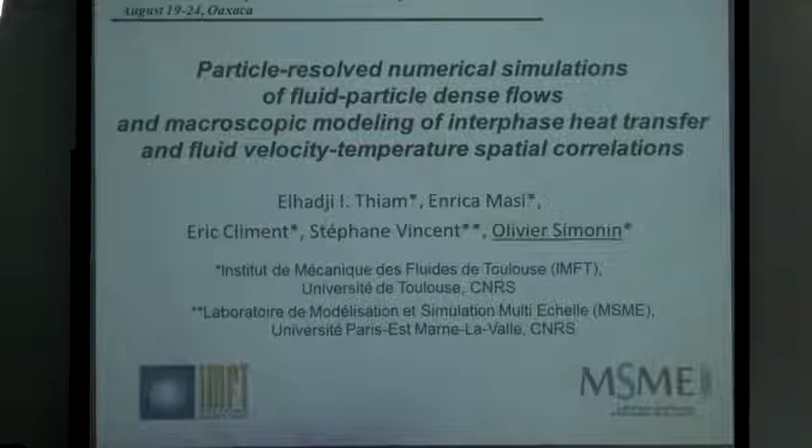So just first as an introduction, I told you that I'm doing simulation for 30 years, and this is the list of applications I have performed during this. It's not an extensive list, but it's incredible the number of particle fluid flows which can be encountered in industrial applications. Okay, and this is the ones I have to simulate, and some of them are missing.

But you have the problem of solid rocket boosters, for example, or the problem of coal-fired furnaces, or uranium oxide fluorination, which is a dusty problem. But if you are just doing the simulation, it's okay.

And also, as we have seen before, there is a nice new problem like chemical looping process or concentrating solar power. I have also made a very nice experience, which is to apply the modeling approach directly to the problem of volcanic dome collapse and pyroclastic flows, because in fact the models we used are probably more advanced than the ones used by people in this field.

Or the flow is really a multi-phase reactive flow with a lot of heat transfer, but with some scales which are a bit different. You know, you have some particles of 1 meter in size and so on.

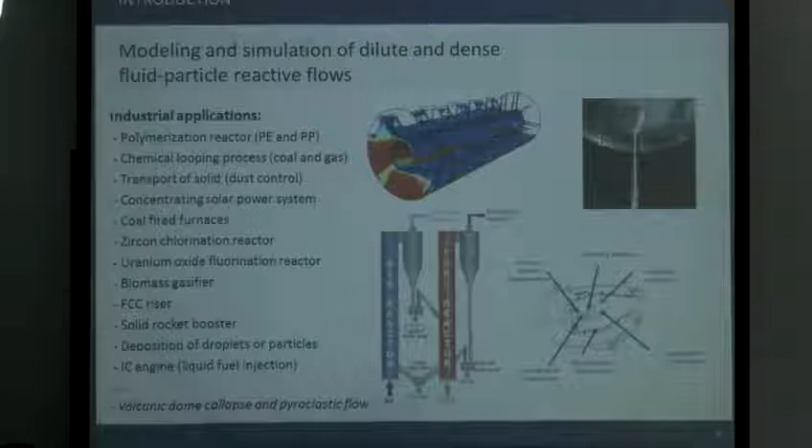Okay, so I have some kind of list of problems, but I think everybody here knows about the physical mechanisms and what can be the modeling challenges, which are a lot. Okay, as we say with Hans, the more we open doors, the more we find new questions. So it's a problem.

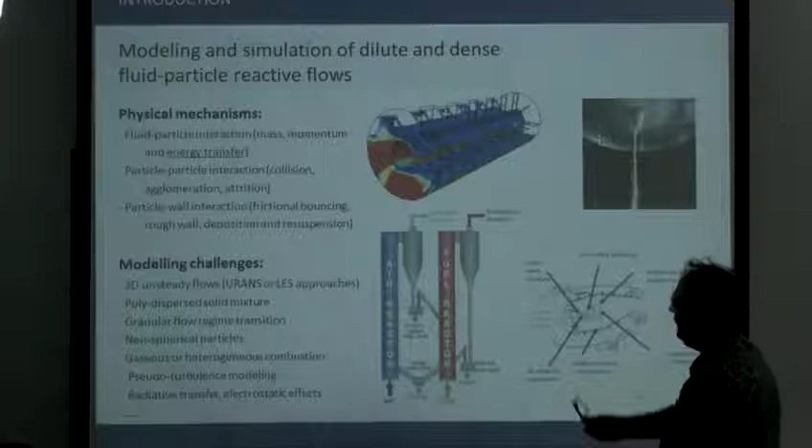I don't know how you will manage in the future, but I think we probably also need to simplify and try to extract from all the simulations some simplified approach, because I'm always very impressed by DNS, but every time new phenomena appear, and we don't know how we can account for them. So in my presentation, we just focus on the question of energy transfer, which seems to be obvious, but in fact we don't have so much information about that.

So the methodology we are using is very classical now, and we have some very nice examples here. And we have roughly 3 different scales of simulation: one is a microscopic scale, the particle-resolved simulation.

The mesoscopic scale, where you can track 10 million particles, and you can capture collective behavior. And finally, we want to go to the macroscopic scale. And we are running effectively, as I showed you before, really a lot of applications. And the scales, we can say about 1 millimeter, 10 centimeters, 10 meters to 10 kilometers.

If you are simulating the volcano, then you need to have a large domain of simulation. Okay, so I think that at this kind of scale, normally the discrete particle simulation becomes unfeasible, but the complementarity of the approaches is really very important.

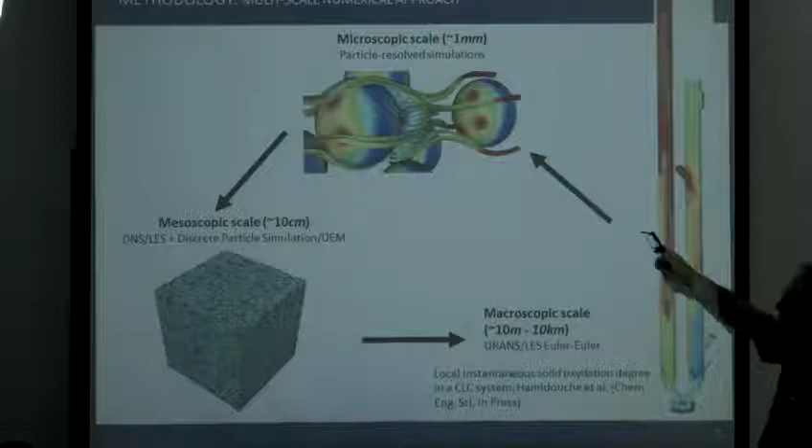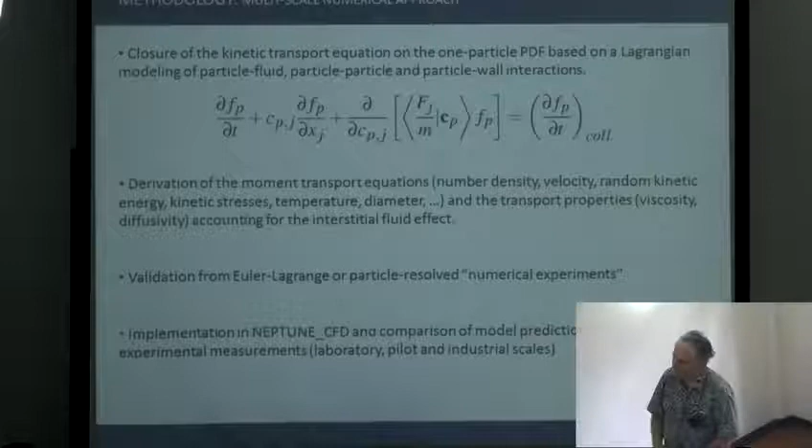So in fact, in my talk, I will skip directly from this one to this one, and I will not pass by the intermediate approach. So this is just the explanation of how we can pass from one level to another. And for me, the kinetic equation is important, because it's a tool which allows me to make this change of scale, okay, to pass from the microscopic to the mesoscopic and finally to the macroscopic scale.

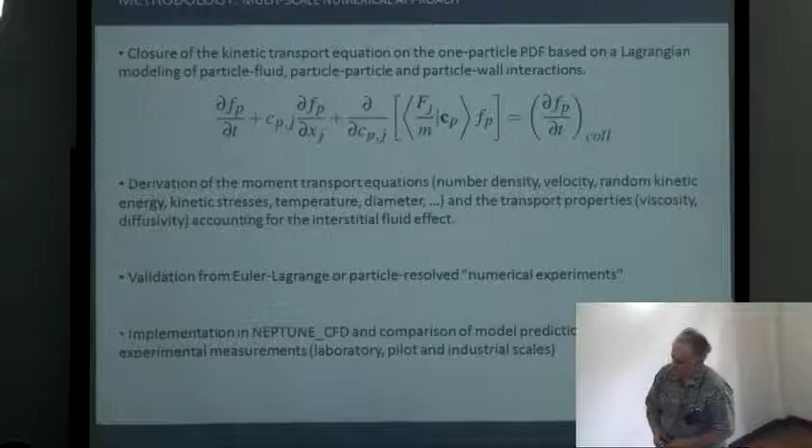And finally, we implement our model in Neptune CFD, which is a code developed for nuclear applications, but we have extended it to gas-particle flows or fluid-particle flows. And then we can really apply it to a real process.

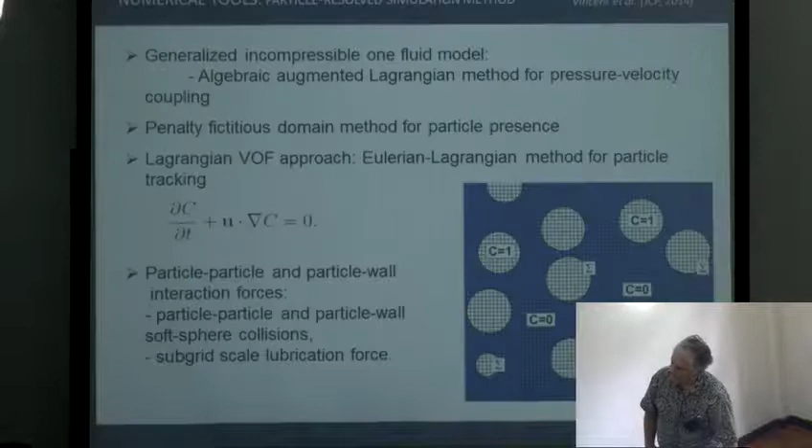So for the tools, I will give very few details, and if you are interested, there are a lot of details in the paper of Stéphane Vincent in the JCP. But roughly, the specificity is that it's really dedicated to particulate flows.

So we can treat the interface equation in a Lagrangian manner because we really know the shape will not be deformed. So it's interesting because it helps us - we have no diffusion problems and so on. And also, we need to treat the collision, the interaction between the particles.

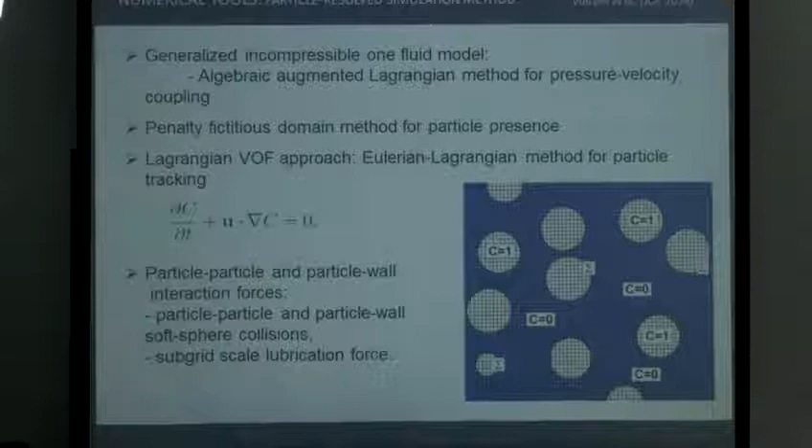So we need to have this Lagrangian treatment of the particles, so we can include the particle-particle and particle-wall interaction force, and we account for soft-sphere collision, and we also have a subgrid lubrication force effect. So the equation set we solve is the one written above.

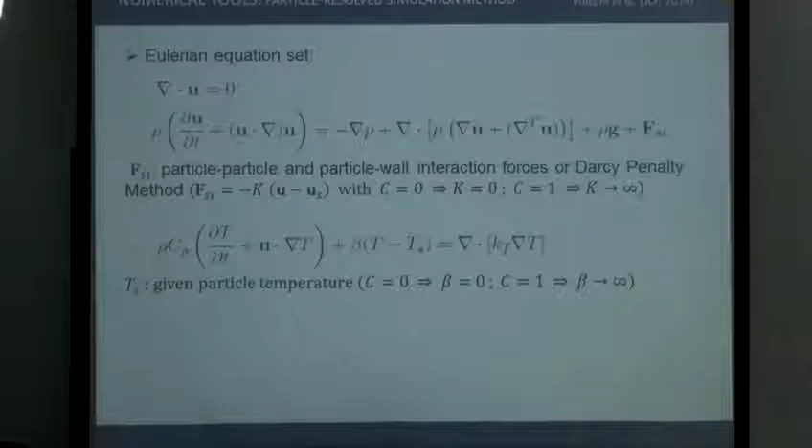Then you have a viscosity which depends on conditions - if you look roughly, it's more sophisticated than that, but roughly we can say the viscosity is infinite in the solid and is the true fluid viscosity in the fluid, but the viscosity is not the same according to the shear, and there is some sophisticated implementation.

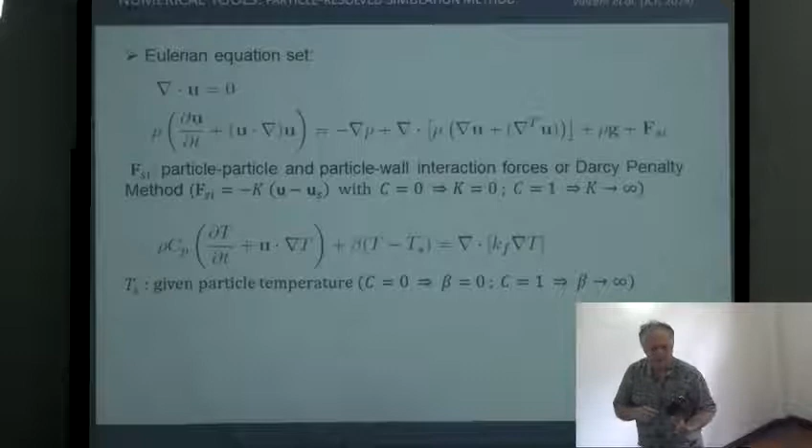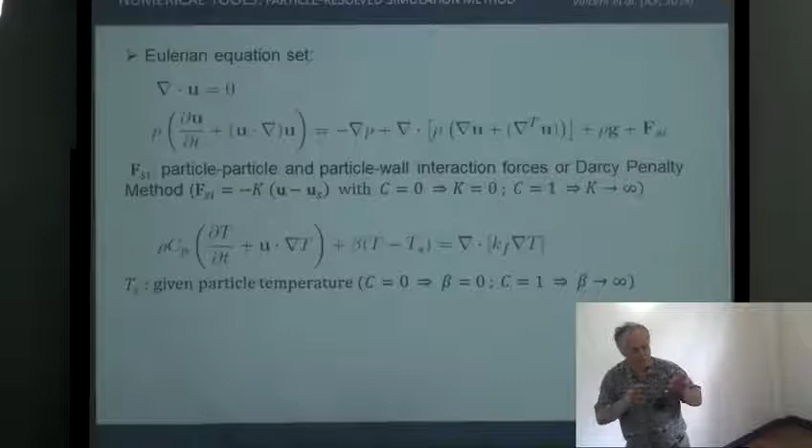And you have an additional force term, which accounts for the particle-particle and particle-wall effect, or you can also use it, if you know the particle velocity, to force the velocity by a penalty method. So this means we can use this approach both for unsteady particles which are moving, or particles which are fixed by this penalty method.

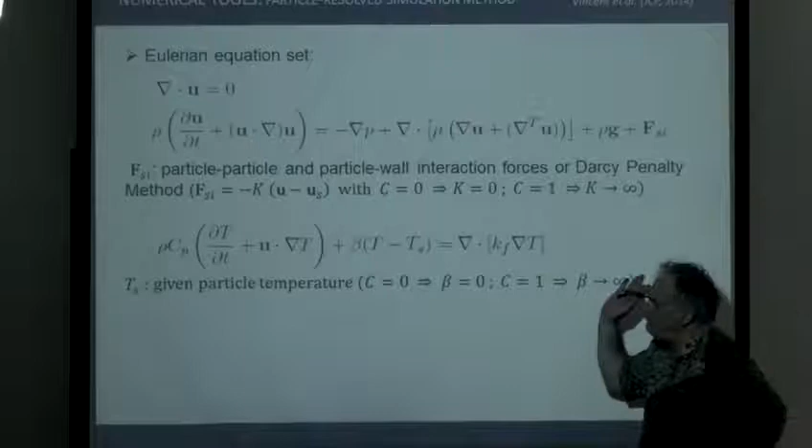And then we have also a transport equation for the temperature. In the approach I will show you, we just use a penalty method, and we will force the temperature of the particle. So it's a simple case. We have used this code in several applications, and I will just show you very briefly some latest results - I'll be brief because it's a simple flow.

It's just a Couette flow. In this Couette flow you have two moving walls, and we are trying to analyze the dynamic behavior of the Couette flow. So you can compute the mean velocity, you can compute the particle kinetic agitation. In this case it's mostly uncorrelated kinetic energy.

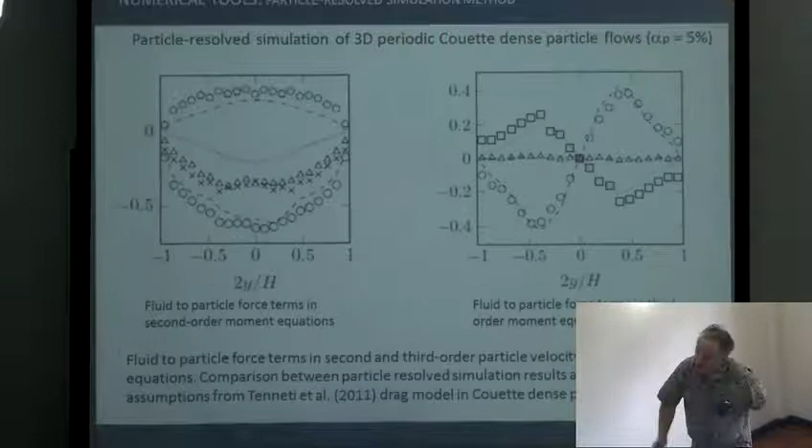And more interesting, you can also compute the drag correlation terms which appear in the Eulerian equation. This is really interesting, and you can compare these drag correlation terms with the ones you can derive from existing model assumptions. For example, it's very impressive, I think, because you have no adjustment of anything.

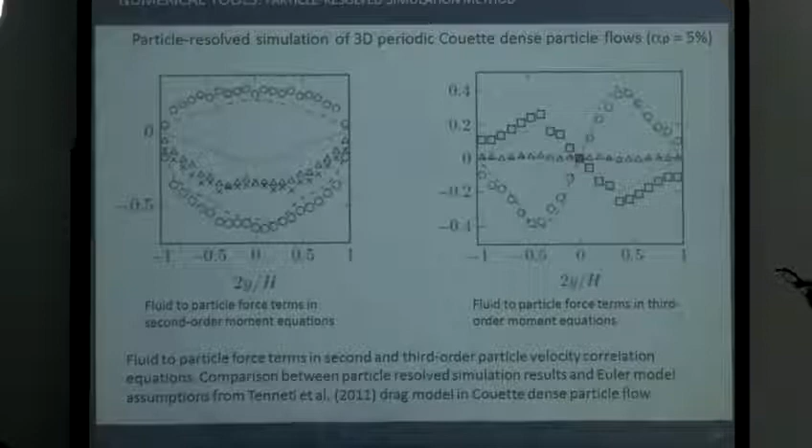Just by applying the Tenneti et al. correlation, you can see that the second order drag term and the third order drag terms are quite well captured by the model. And it's much better than if I use the classical Wen and Yu closure.

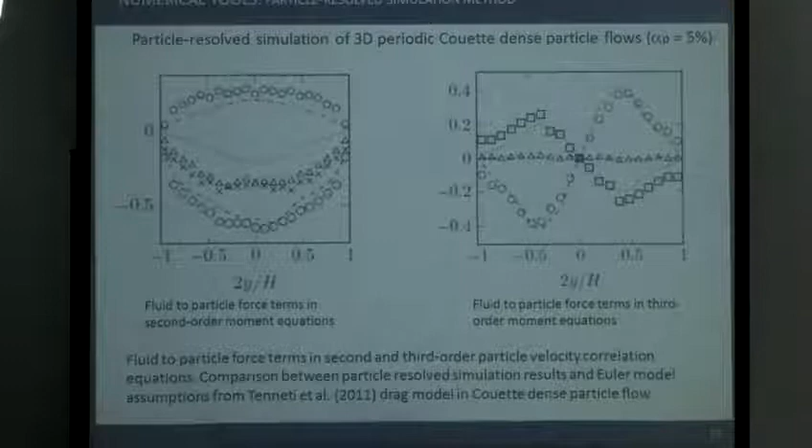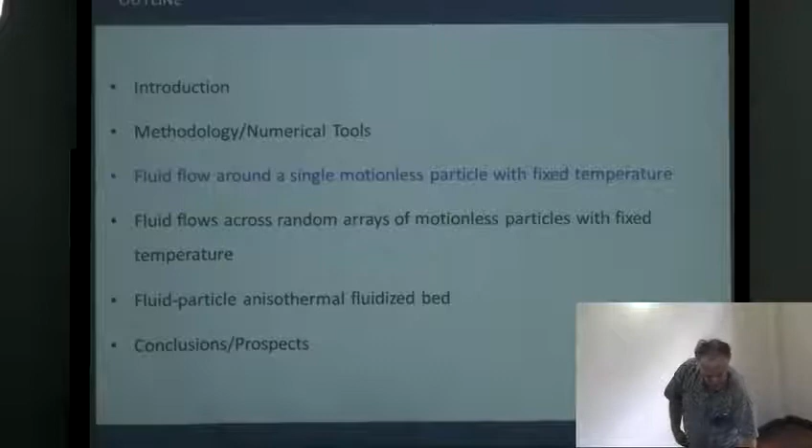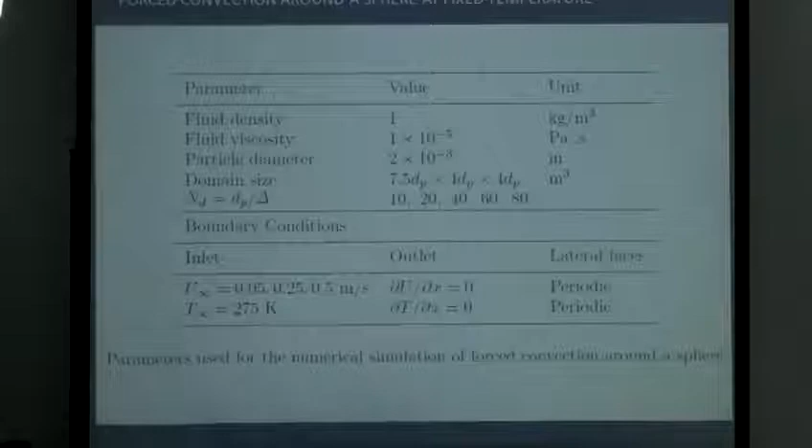Then we move to the topic which is more about temperature. I will go very quickly on this part, just to show you that we have tried to perform some validation of the heat transfer also in the case of a single particle. And we have tested the sensitivity to the number of cells in the particle diameter to see how the prediction converges. We have done that in both unsteady and steady conditions.

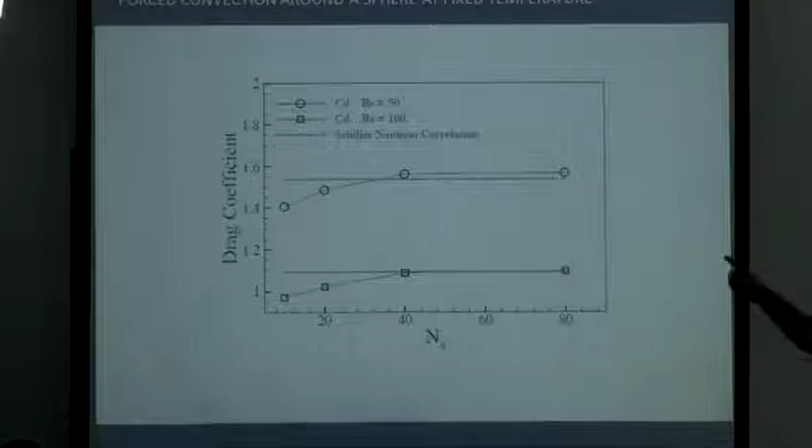So these are some typical results, for example for the drag coefficient with respect to the number of cells in the particle diameter, showing how it's converging. And the same for the Nusselt number.

In fact, we have two values because we compute the Nusselt number in two different ways: one from the particle heat transfer and one from the heat balance on the fluid. So normally we should get the same result - it's also a check on the accuracy.

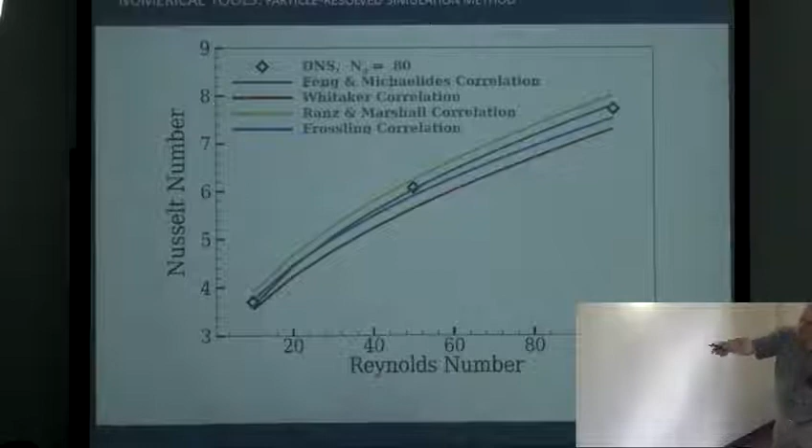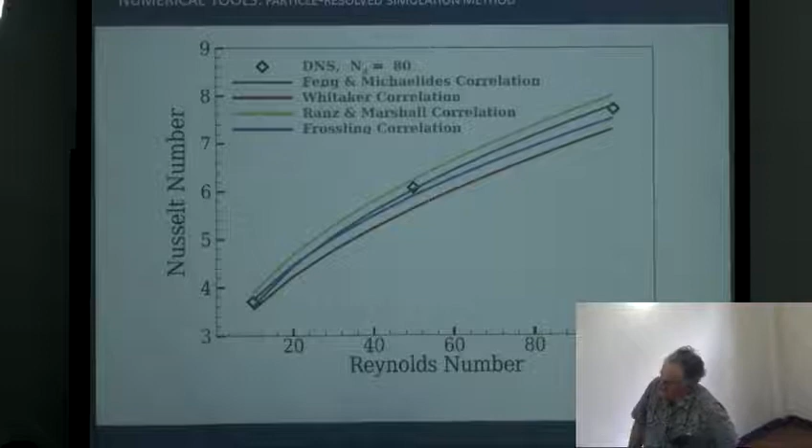So finally, if you compare the Nusselt prediction with respect to available correlations, we can see that we have a good agreement. But the number of cells in the particle is quite large, 80, and we will not use 80 cells in the next simulation. The best agreement is obtained for the Feng and Michaelides correlation, but that is also derived from numerical simulation. So sometimes...

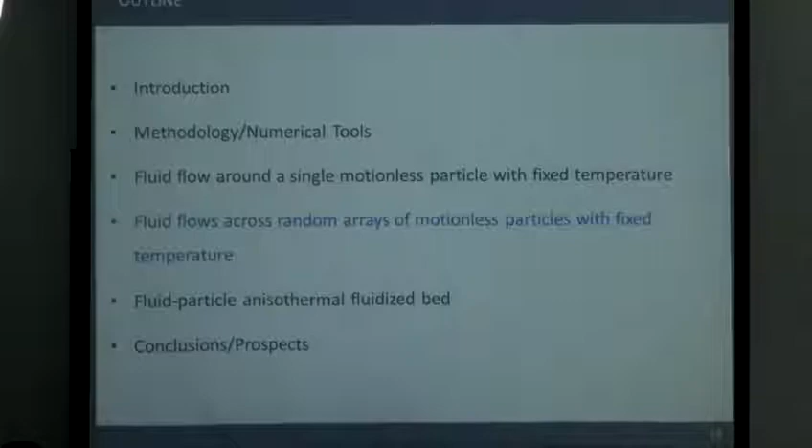Okay, so most interesting is the fluid flow across a random array of motionless particles with fixed temperature. It's a classical case now - this has been done before, but we will also be doing it again. And this is the description of the case.

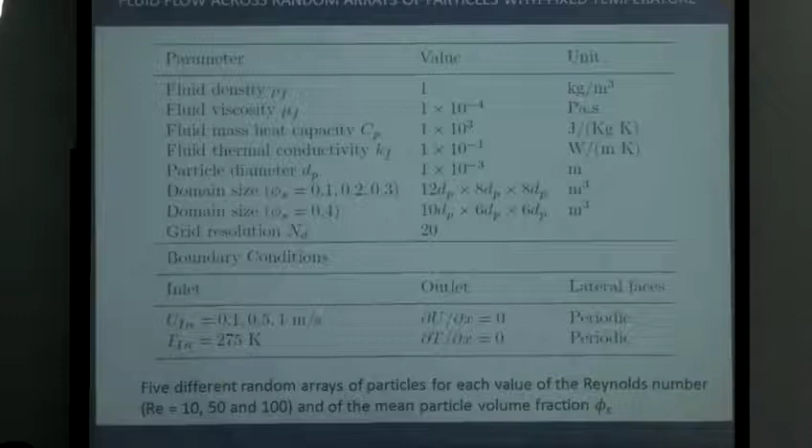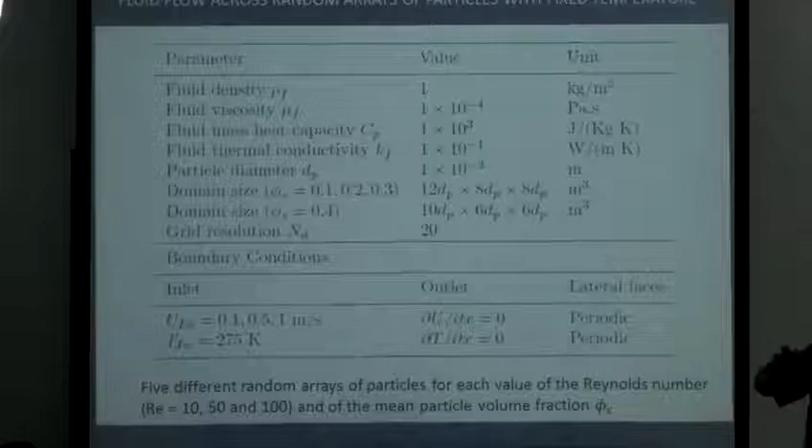I think this part isn't very interesting by itself. The only interesting thing is that we play with the mean solid volume fraction, from 10% to 40%. You see that the grid resolution is quite coarse, 20 - not so much. And in fact, we have generated random arrays, with 5 different random arrays for each case, so we can make an averaging over the random arrays, okay?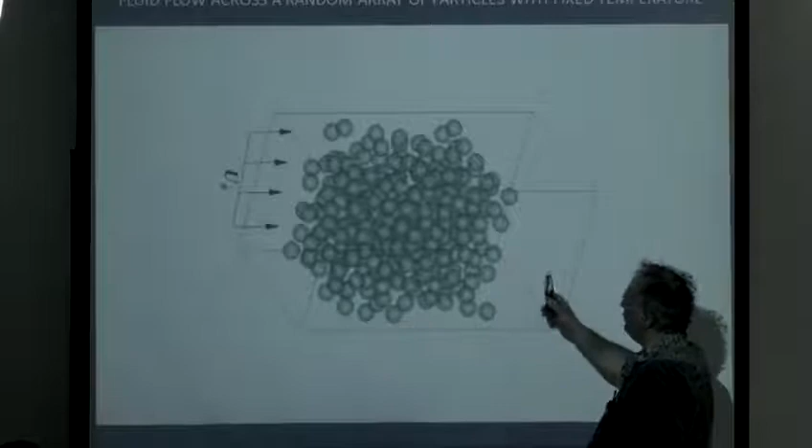Okay, so you see that we also vary the Reynolds number. This is the sketch of the flow - you have the entrance and the outlet, and we want to extract the Nusselt number in a steady state region. So we will measure it in this region.

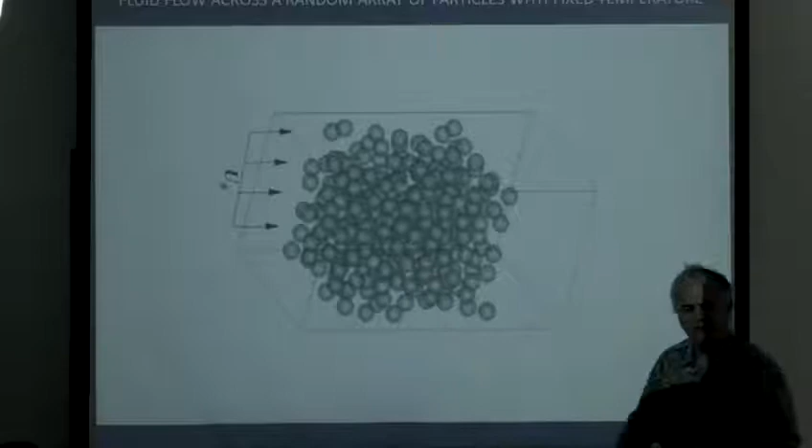So typically, this is the volume fraction that we obtain if we make an average on the transverse direction of the flow. You can see that this is the entrance, then it's quite a steady situation, and then it's the outlet. So when we try to extract the Nusselt number, we will compute between these two planes.

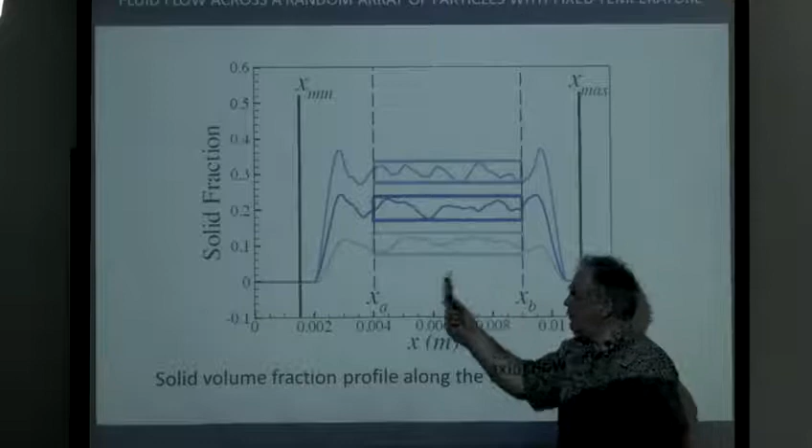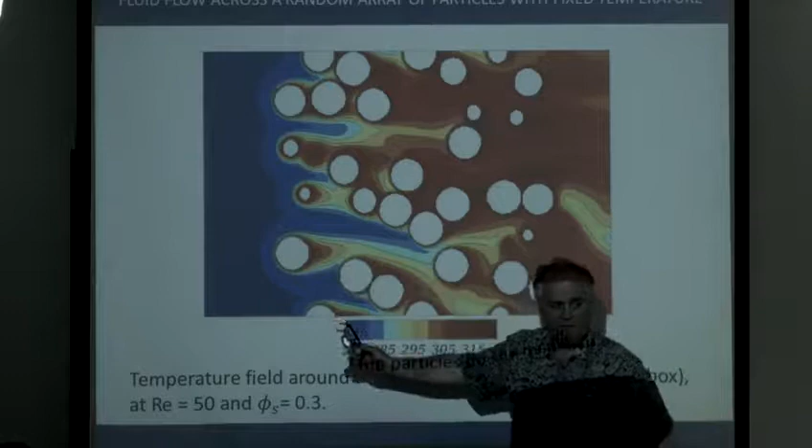Okay, so this is a picture of the temperature field around the particle, taken in the middle of the box, for a given Reynolds number. It's clear that you have a very strong effect at the entrance, but also some very strong effect due to the respective position of the particle, which is a very big problem, I think, for the modeling.

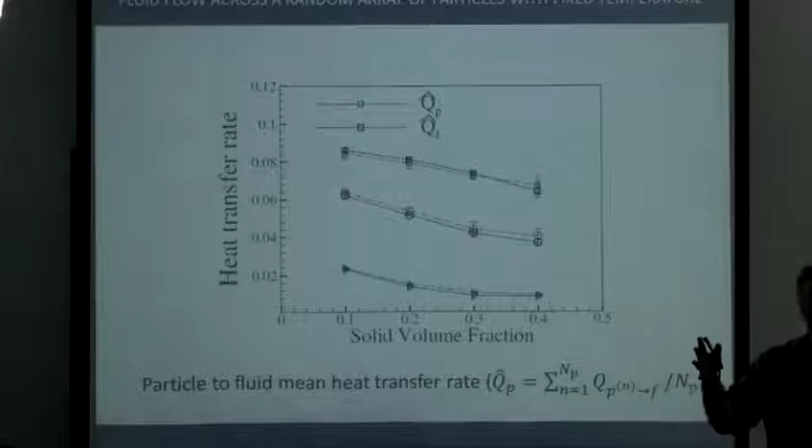It's a total heat transfer rate across the array for the different cases and for different Reynolds numbers. What we compare is the sum of the flux computed for each particle with the balance on the fluid flow. So normally the results should be identical. We are not too far from identical, okay.

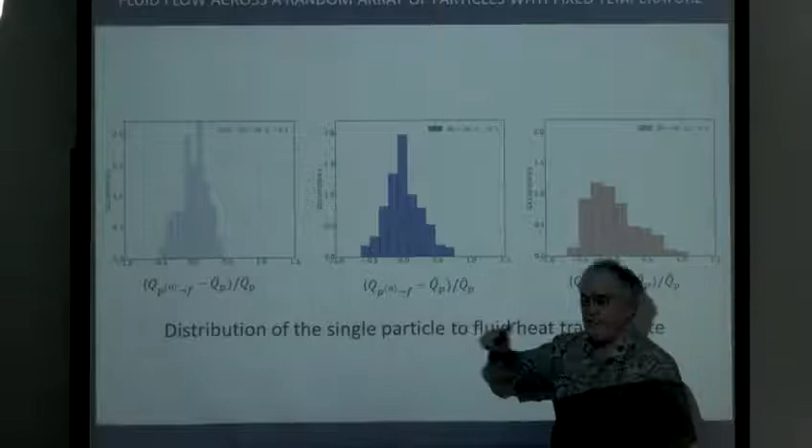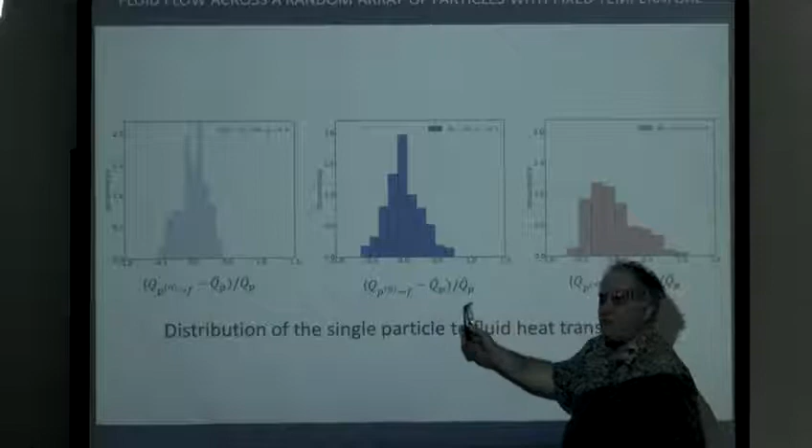Very interesting, I think, is the dispersion of the heat flux. This is the distribution we found in all our simulations, from the heat transfer from a given particle to the fluid, normalized by the mean heat transfer. And you see that the dispersion is huge.

So it means that if you want to do a Lagrangian simulation, it's a big problem, because normally all the particles have the same temperature, and you have more or less roughly the same fluid temperature viewed by the particle. We have tried to extract a more representative fluid temperature by playing with the mesh averaging around the particle, and in fact it is not correlated. The information is not enough.

It's clearly probably mostly due to the position of the neighboring particle. So it's really a question of the arrangement of the particles more than a question of the fluid temperature viewed by the particle. So it's really a big problem. Hopefully, in the Eulerian approach, everything is filtered. I don't care - this is a problem somewhere, but I don't care.

You have the transfer from particle to fluid, and you have a correlation which is not a turbulent correlation because the flow is steady - it's a space correlation. It's because you have a heterogeneous distribution of velocity and temperature. In the literature, you have two models which are generally available.

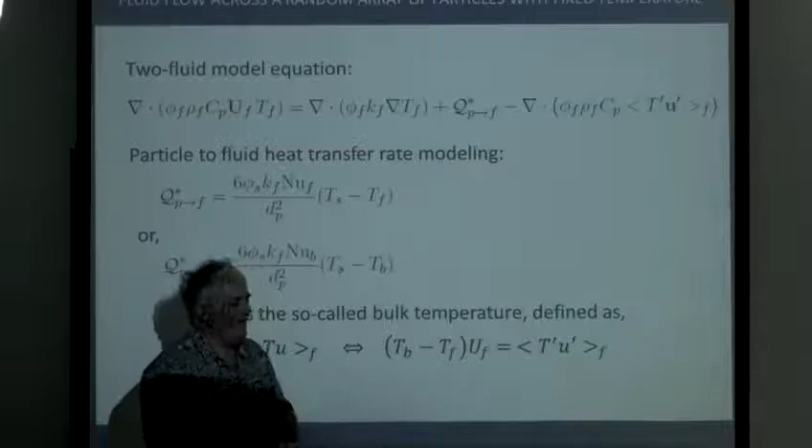One is in terms of the mean fluid velocity - this is the most practical from the modeling, the simulator point of view, because this is the temperature you compute. Normally you prefer that the model is written in terms of computed variables. But this temperature, this modeling seems to be not so robust sometimes, and people sometimes prefer to write in terms of

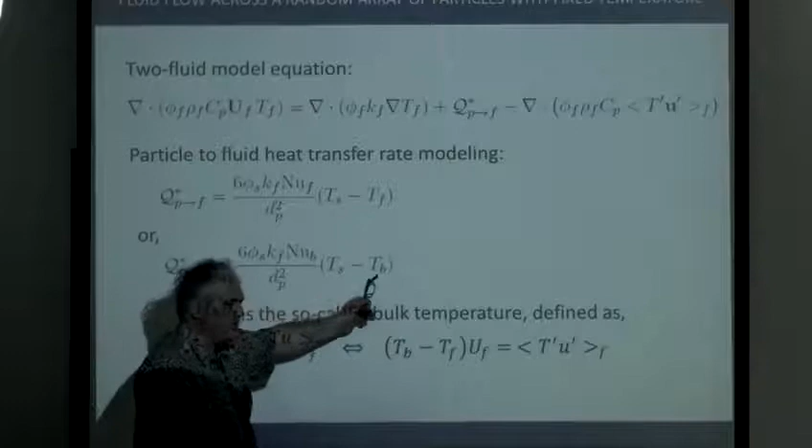the bulk temperature, which is in fact the temperature conditioned or weighted by the fluid velocity. So naturally you have two Nusselt numbers, because both correlations should give the same transfer. You have to be careful of that - you cannot use this bulk number with this temperature. It's completely wrong.

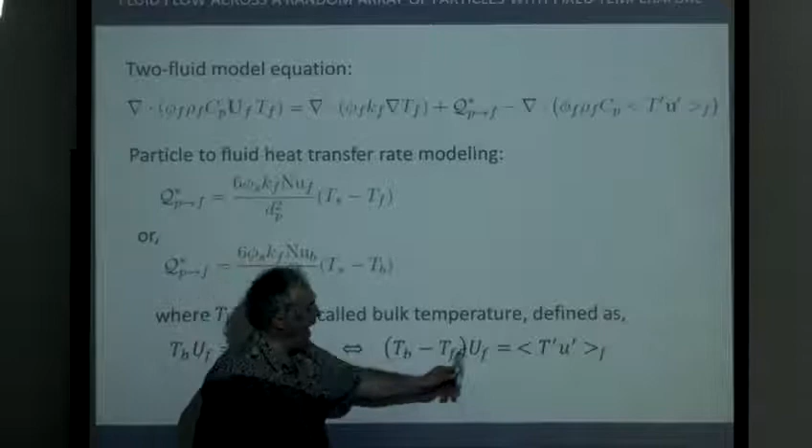And it's interesting to notice that according to this definition, there is a direct connection between the difference between the two definitions of the temperature and the temperature-fluid velocity correlation. So in fact, it's funny because it gives us information about this flux.

So we have computed this number, this bulk Nusselt number, from the simulation results, and we have compared it with some correlations from the literature, in particular with your work. It is this one, no? Sun et al.? Oh no, Dean, sorry. Okay, we can see that the agreement is good.

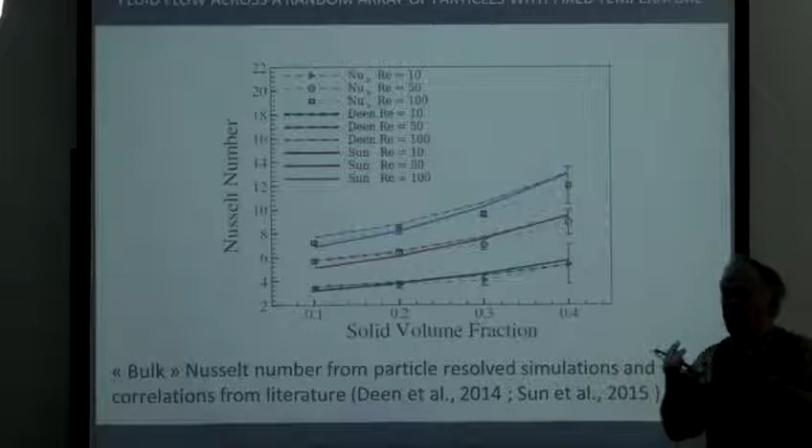In fact, this is not an error bar - it is the dispersion due to the 5 different random arrays. So this is a mean value, but we have 5 different random arrays, and maybe 5 is not enough - maybe the average is more like that. So it gives you also an error if you want, but it's a statistical error, not a numerical error.

And we have also computed the standard Nusselt number, we can say. And it's very interesting - we have no true explanation, but it compares very well with the Gunn correlation.

Surprising, yeah? But you can see that the two Nusselt numbers, because the scales are the same, this Nusselt number is much larger, larger than the previous Nusselt number.

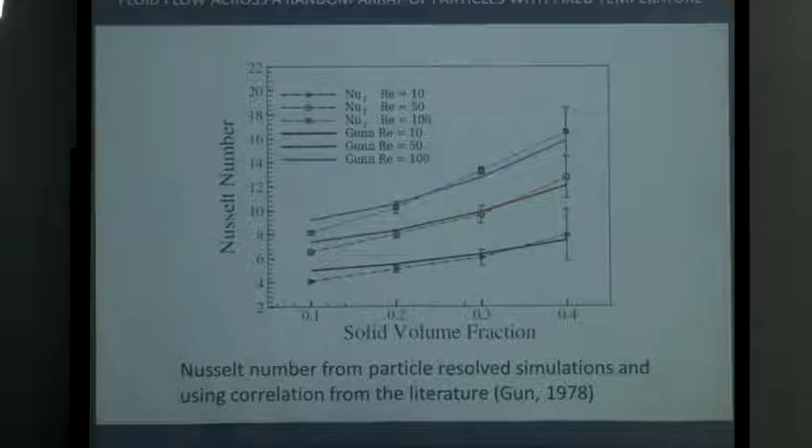So we are more or less satisfied because we obtained the same type of result, and we have also identified this question. The next step is, can we from this simulation extract some information about the velocity temperature correlation? Just by definition, according to the heat flux, the correlation is directly related to the ratio of the Nusselt number.

It is a definition result, not an assumption, okay? In our case, because it's steady and so on and so on.

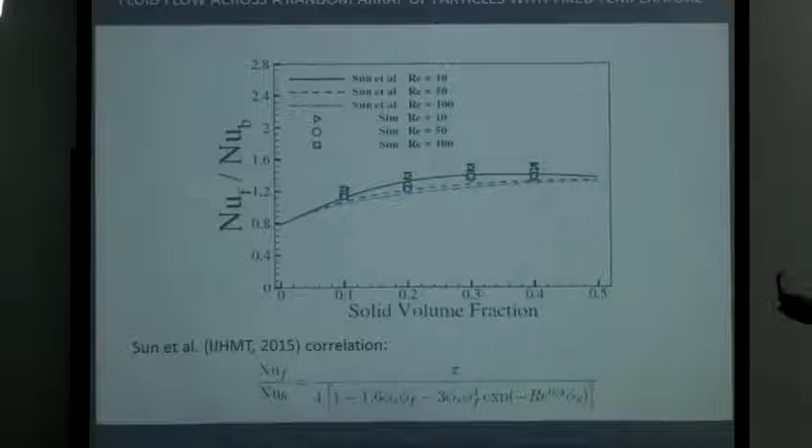And it's funny because in the Sun et al. paper, they gave a correlation of this Nusselt number ratio, which, as you can see, is always larger than 1 for our simulation case, and can be about 1.2, so 20% larger.

And this correlation worked quite well with our simulation because we didn't fit anything. It's a direct comparison.

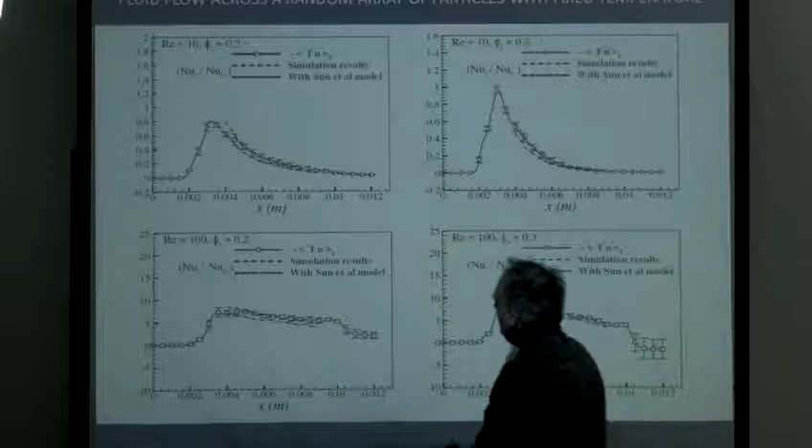So finally, what we have done, we said okay, maybe now we can compare locally, because this was an average analysis. So now we will see how this fluid velocity correlation is changing in the flow, not at the entrance. My student was too careful.

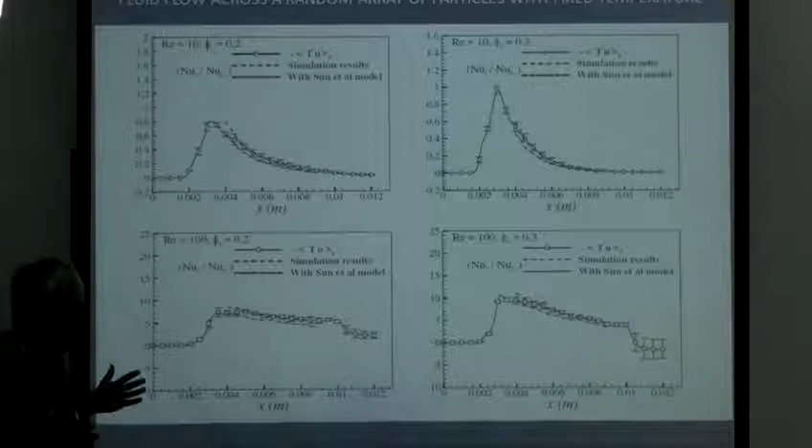So I think it's a wrong idea - you should try, you never know. Sometimes the models are working better than you expect. So he said, no, I compare only in the good region.

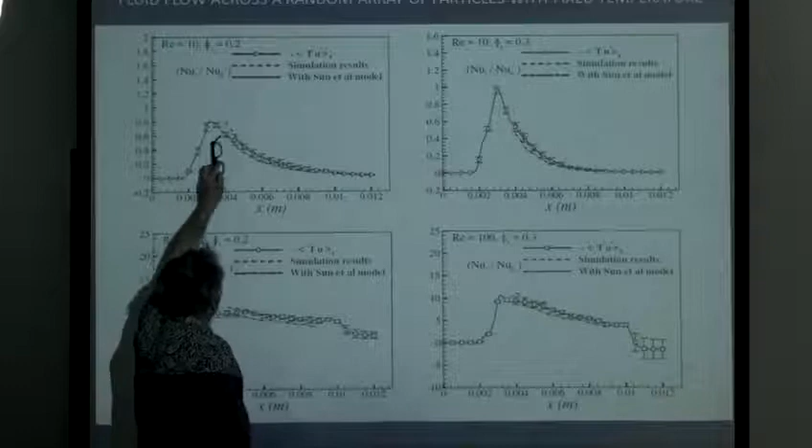But these are in fact the temperature velocity correlation measured across the flow, and we compare with the expression given in terms of the ratio of the Nusselt number. We compare with the ratio obtained from the particle resolved simulation, and it works.

And it's logical because, in fact, it's nearly steady, so it's homogeneous. The only variable which changes is the mean temperature, so it works well. And if we use the correlation, the agreement is also very good.

An interesting thing is that if you look carefully, what happened? If you look carefully at what this correlation means, in fact it changes the transport velocity, because you can add this correlation term to the mean convection.

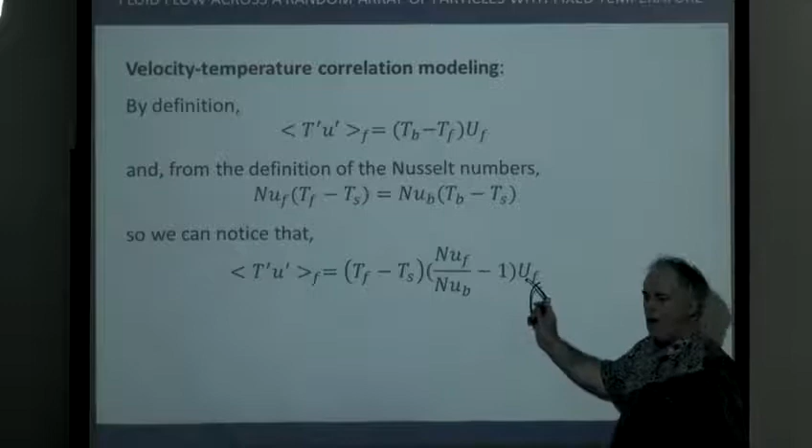This means that the true velocity is the ratio of the Nusselt multiplied by the fluid velocity. So in the two-fluid equation, I should not use UF as a convective velocity, but Nu_F divided by Nu_B times UF. So it's a 20% larger transport velocity.

Okay, so now we say, that's interesting - what happens in a fluidized bed? So when it's moving, what results may we have?

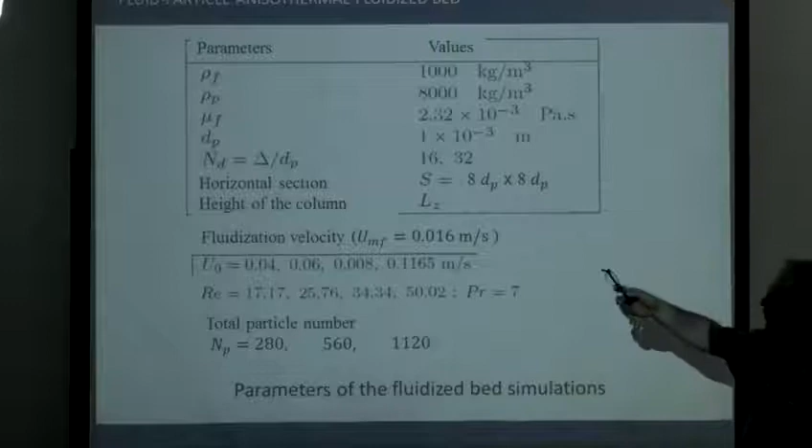So it's really a preliminary result, but we have made some simulation of a liquid-particle system. It's a fluid-particle case, a liquid-solid flow, but the ratio between the fluid and the particle density is just 8, so it's not a gas-solid flow.

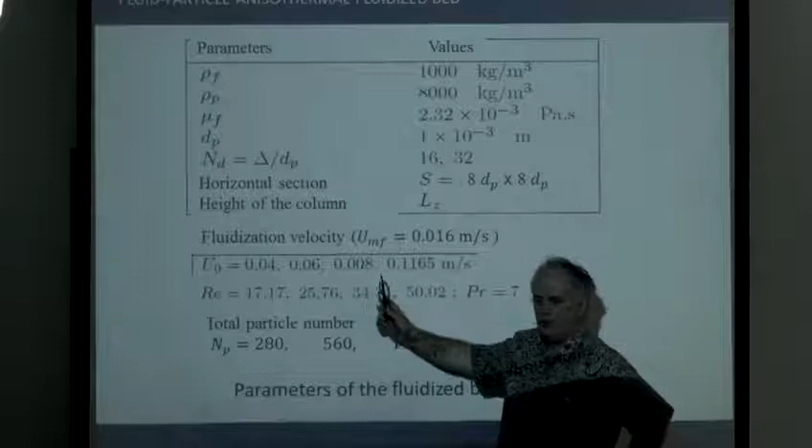And we have played with the fluidization velocity - and this is a mistake, there is a zero too many, okay - and you can compare with the minimum fluidization velocity.

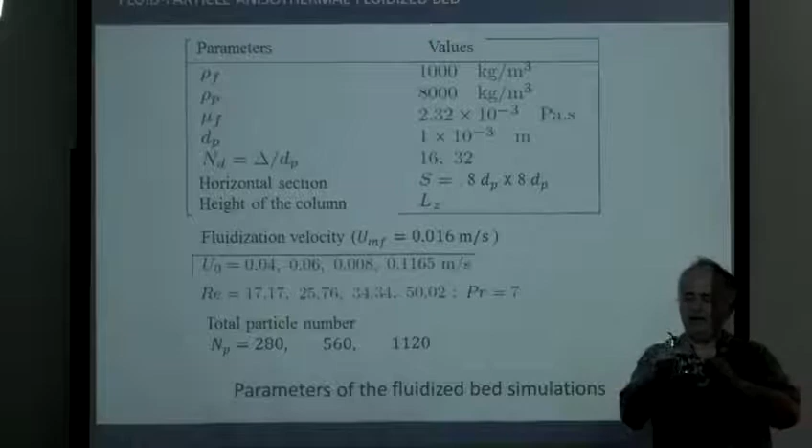And we choose the Prandtl number just because we want to have the exchange of heat across the width of the fluidized bed. Because if the exchange is too short, the fluid will be heated within just two rows of particles, so we fit the Prandtl number so that the exchange happens over the total width.

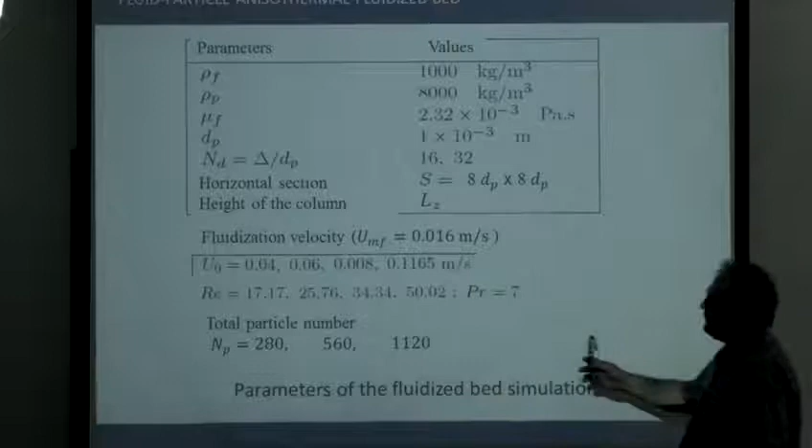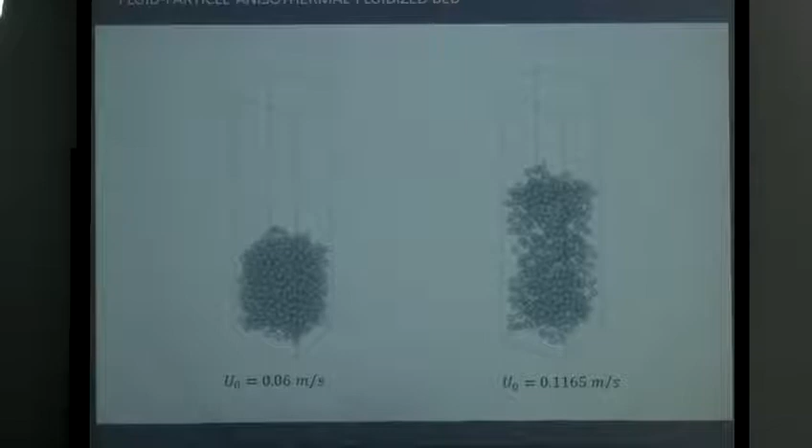And we make some simulations with different particle numbers to see if we have an effect of the height of the bed. Typically this is the result for one case, for two different fluid velocities.

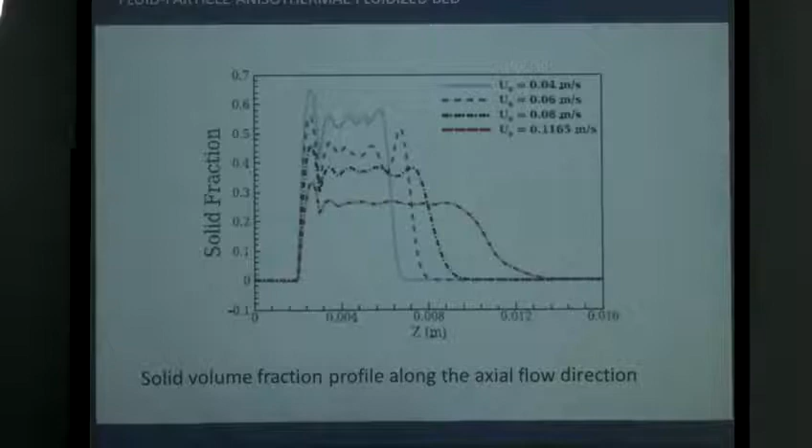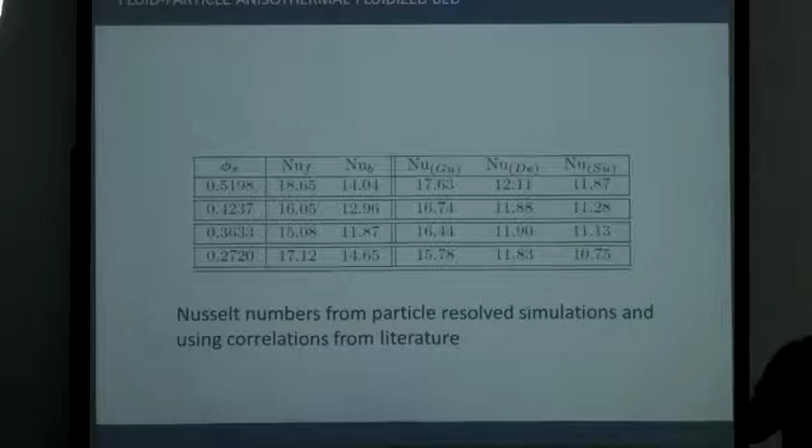And in fact, we can again compute a Nusselt number. It's important to realize that I am in the frame of the fluid phase, okay? I'm looking at the average heat transfer from the particle to the fluid. I'm not talking about the Nusselt number of a single particle, because it's completely different, as we said before, because of the arrangement and so on.

As you see, we can compute both the two Nusselt numbers, and we have this difference with a larger standard Nusselt number compared to the bulk Nusselt number. The agreement with the correlation is not so good, but it's not very far. We don't see some very strong effect due to the fluidization.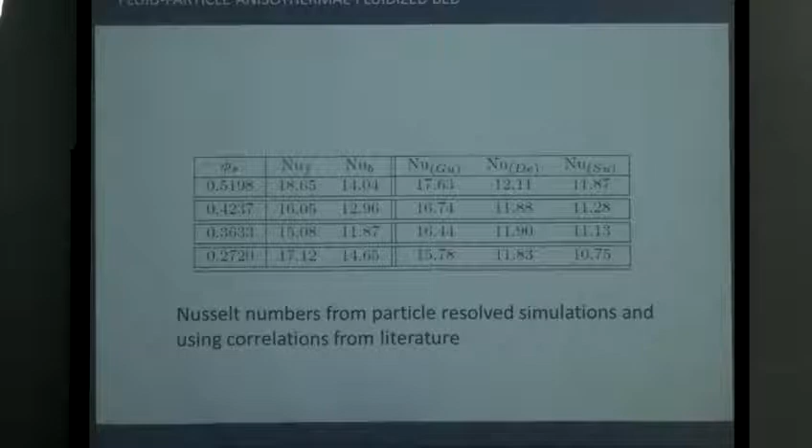There are some effects, but I'm interested in industrial prediction, so for me, 50% is identical. I understand that if you want to publish in JFM, 50% is 10 papers, but if you are interested in simulating a full industrial process, maybe it's not so important.

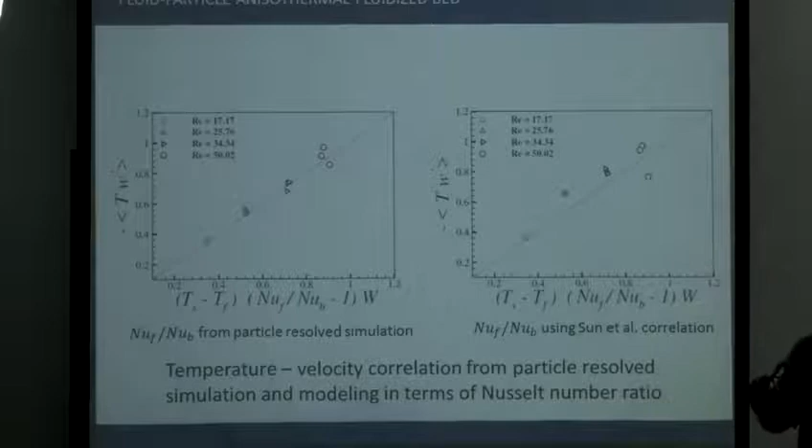It depends. Another very interesting thing is to check this model of the temperature velocity correlation. Even if we are working on some average, and now we are unsteady, so the assumptions we made before are not completely satisfactory, you can see the model is working very well. This is the comparison between the two values. If we use the correlation from Sun et al., it is not excellent, but it is not bad. We have a good estimation of what is going on.

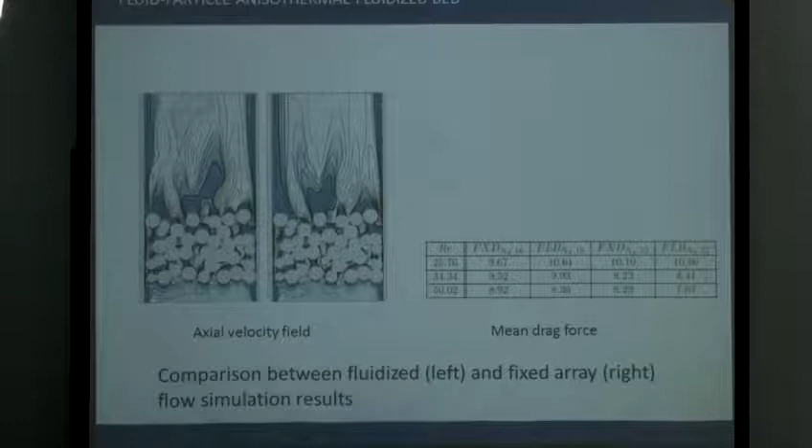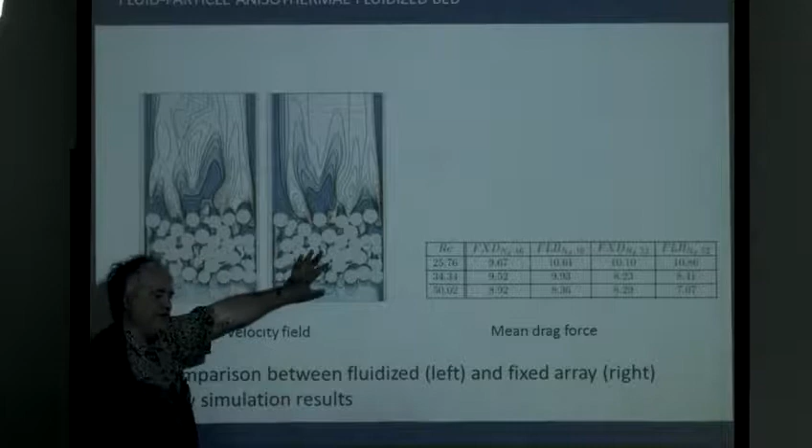Finally, to try to understand what's going on and the influence of unsteadiness, we made a simulation where we take the fluidized bed at a given time and freeze the particles. So the array is exactly the same as the one we have at a given time in the fluidized bed. You can compare the average on this random array, and we have taken several different times, with the one obtained in the unsteady case.

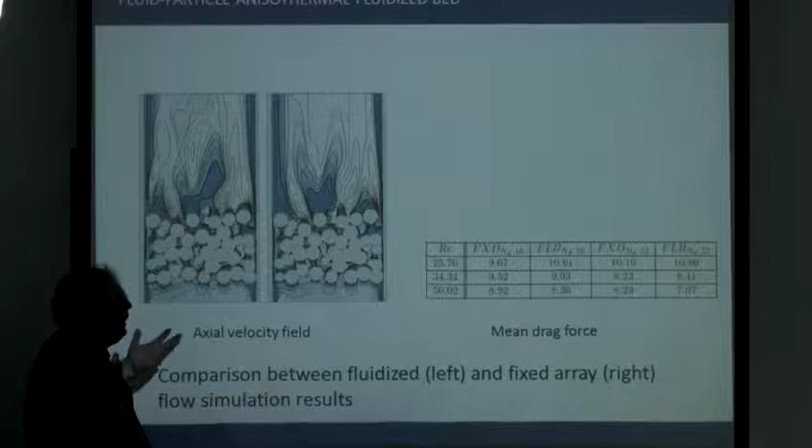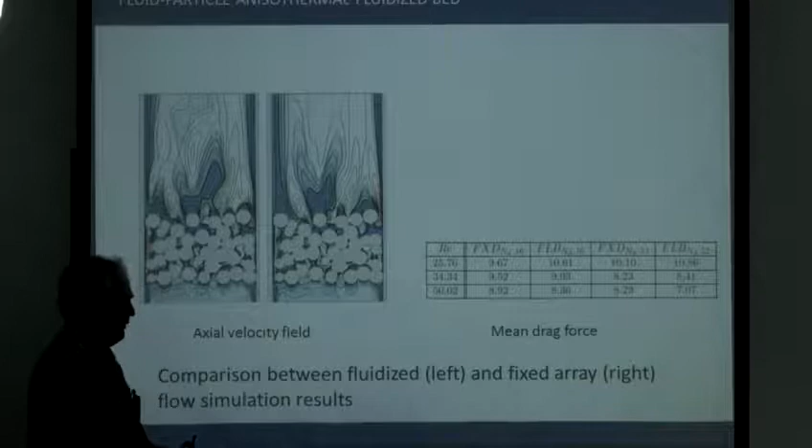In fact, what I want to see is how this inertial effect in the flow will affect the drag or the heat transfer. So it's a nice numerical experiment. We did that, for example, to analyze the modification of the drag force, and we didn't see, for this case, a strong effect.

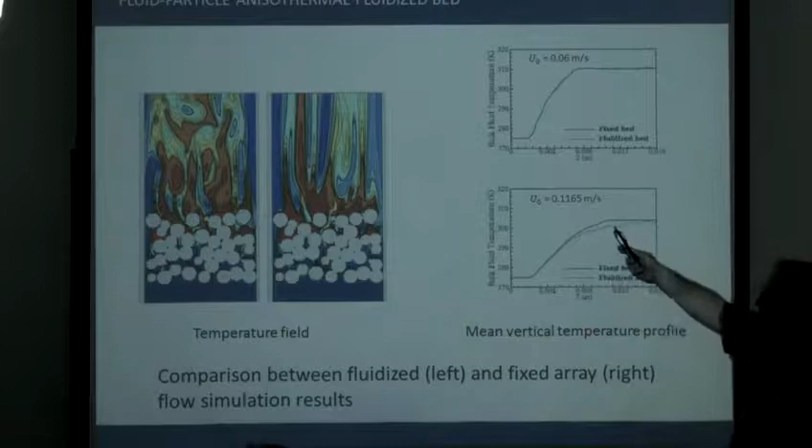We also analyzed the temperature field. An interesting thing is, even if in average it looks roughly the same—this is two different fluidization velocities, so we expect more effect when the fluidization velocity is larger, and this is the case. We have the difference between the fixed bed and the fluidized bed of the mean bulk temperature, which increases. You can see that the fixed bed has a larger exchange coefficient than the unsteady bed.

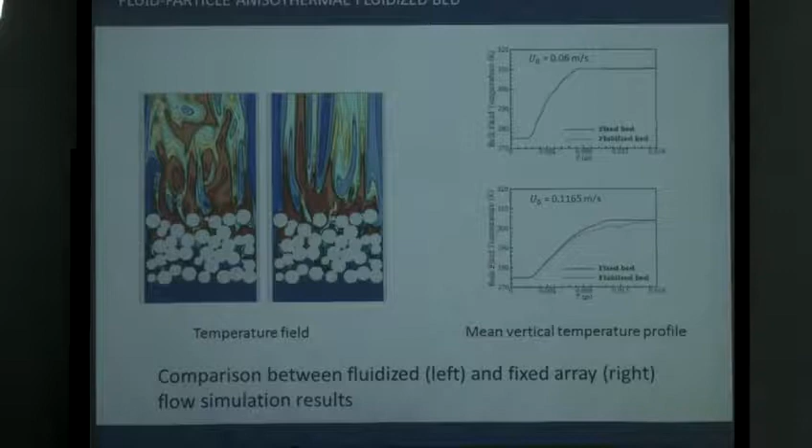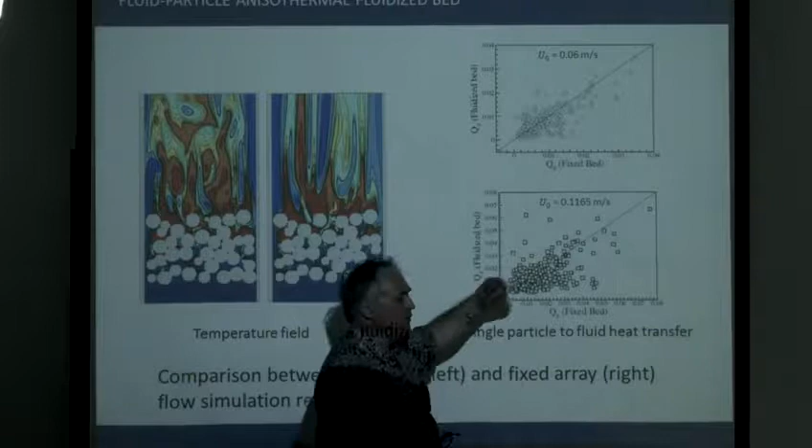But now we've made another analysis, which is more local. We are comparing the heat transfer on each particle, at the same position, but one in the fixed bed and one in the fluidized bed. You can see there is a huge dispersion, which means, in contradiction with what I said before, that the arrangement is not enough to explain what's going on, because the arrangement is the same, but one is steady, one is unsteady. So in fact, unfortunately, the local heat transfer coefficient for a single particle depends on the history of the particle.

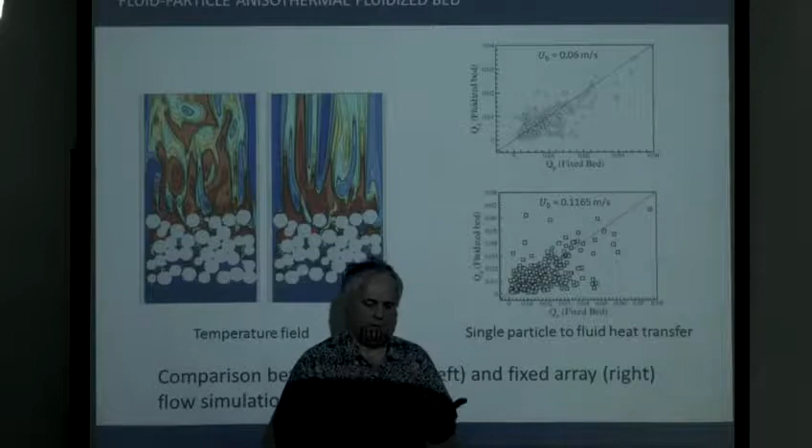So that's awful. I hope it's not crucial in average, but that was the point I said before—each time you open a new door, you find the next one. For Lagrangian simulation, it's a problem, because how do we account for that, and are we supposed to account for that? It's also a very good question, because we have to wonder if, when dealing with DEM, are we really tracking physical particles or numerical particles? That's a philosophical point, as said before by our friend.

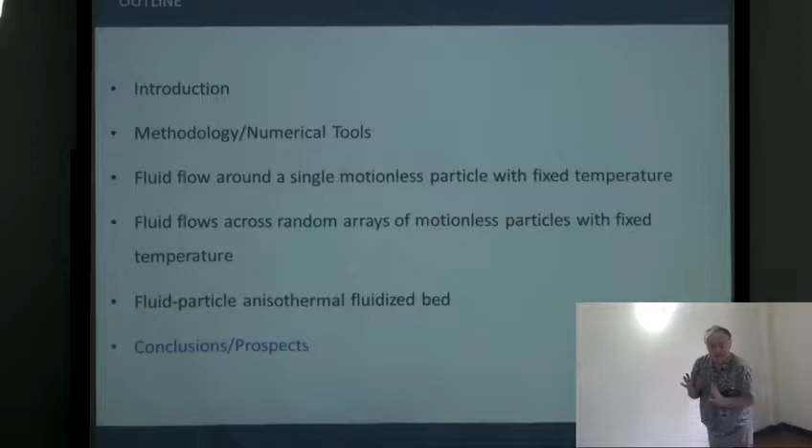So it's finished, that's my conclusion. It's very impressive to see how this particle-resolved simulation can help understand what's going on locally, or also to try to develop some closure models at the macroscopic scale, but this is not original—I think the whole workshop demonstrates the power of this connection, of this utilization of numerical simulation at different scales. The second point is, concerning heat transfer, my case is very simple, because all particles have the same temperature.

So what happens if you start to have different temperatures? The next step for us should be to make a source term in the temperature, so the temperature is no longer a fixed value, but becomes a result of the heat transfer. It should be interesting to see how we can extend, use, or just push away the correlation we have obtained. Thank you very much.